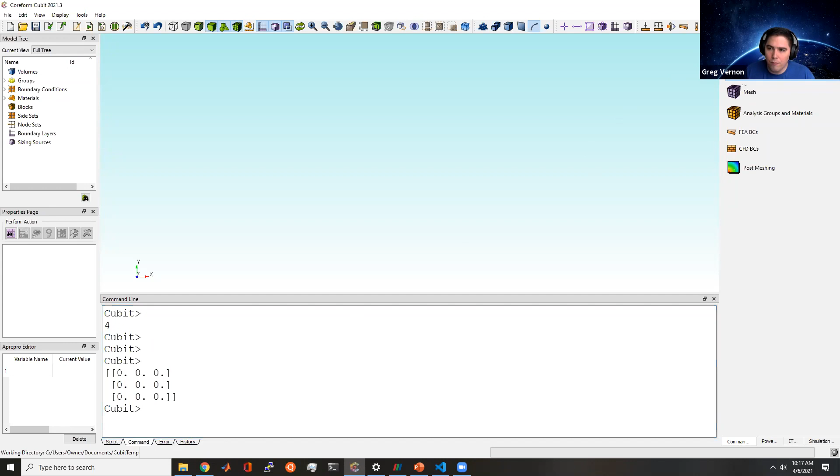Now I want to show how you would use the Cubit GUI to generate functions that you might use in Cubit. It looks like most people are familiar with journaling, but if you're not, Cubit, before it was a GUI, was actually all Cubit command language. Commands are then journaled or logged into a history file. So as we start doing things in the GUI, maybe I'll create a brick of dimension maybe 10, 5, and 1.

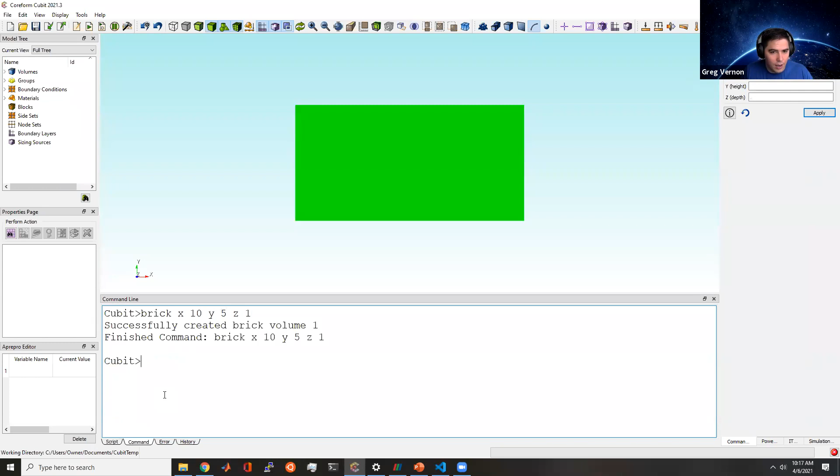The GUI actually sends the command to the Cubit command language processor, and this is journaled in our history. So what I could do is, well, maybe I should just use the GUI for a little bit. I clicked on new file, and that sent a command like reset. I can do things again in here like brick x10 y5 z1, and do things that I had previously done inside the GUI.

Many of you might be familiar with using the GUI to create these syntaxes and then copying your history file and putting them into a journal. These are also logged to the scripting panel. So you can either grab the entire cubit.cmd, or as we'll talk about, this is the first workhorse function, this module cmd or command.

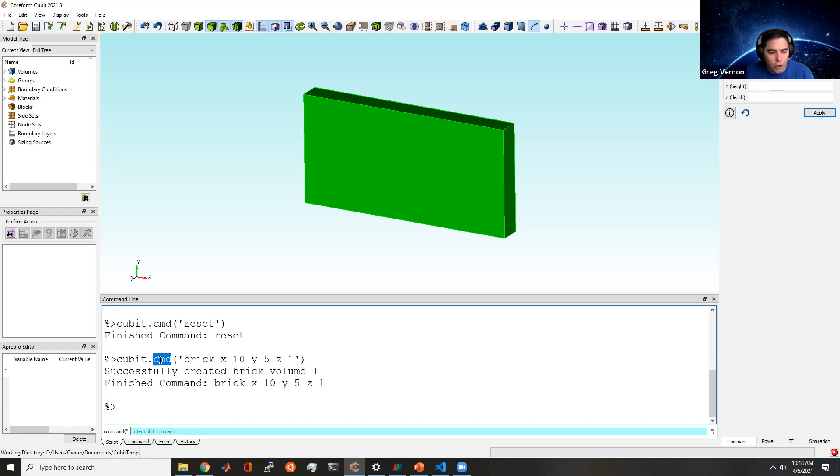Every single Cubit command can actually be sent through the Cubit Python interface and executed as if you had entered it into the command editor. As you can see, I can do things in here like cubit.cmd and pass in a string called reset. That is effectively the exact same as running reset from within the Cubit command language. And I could then do cubit.cmd brick x10 y5 z1, and then I can create this brick.

Now, if you're a Python user, you might want to be able to pass in some arguments into your script and then run those. Many of you might be familiar with Aprepro within the Cubit command language, which will create Aprepro variables. But the Pythonic way with a string is to use string formatting. So just as an example, say that we have variables called maybe x, y, and z.

And we want to pass these into our function. The Pythonic way, maybe I've got some string here. I might copy this overall string, and then for Python formatting, you replace the constants that you want to replace with curly brackets, and then use the string method format.

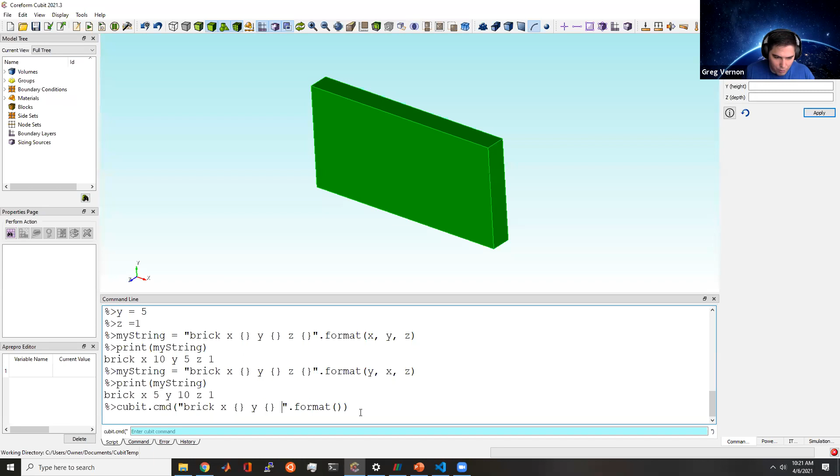And you pass this string into CMD. So putting it all together, your command might look something like this: cubit.cmd. Let's begin our string. I like to begin with my outline. I'm going to put in brick x, curly bracket, y, curly bracket, z, curly bracket, and then format with x, y, and z.

And maybe I'll do cubit.reset so we can see this again. So if I run this again, we'll see that this has created the string, entered in my values, and then executed this command. So that's the cubit CMD function.

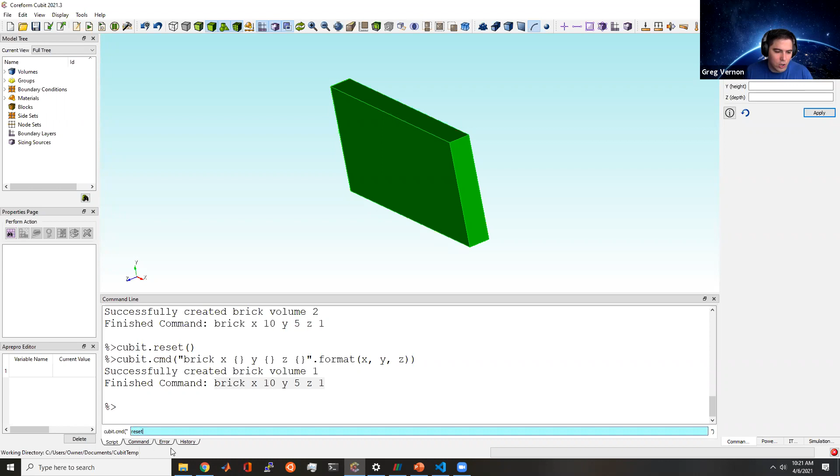Something that new users might like to see - you can't use string formatting here, but if you're not exactly sure, or you just want to do something quick, you can type commands into this little shortcut tab, which is one of the options we set previously, and it'll just run these. That can be useful when you just want to see a command run real quick and maybe extract out something. I personally don't use this a lot, but it is a good training wheel.

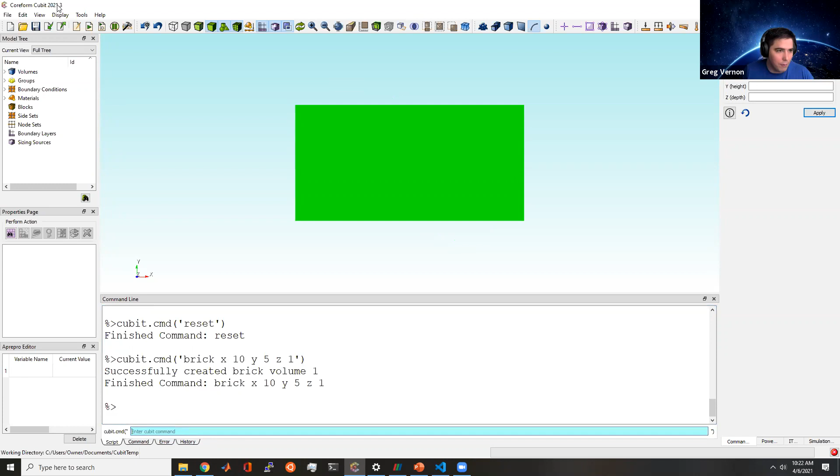Another really useful command, let me open up a good file for this, is a method called parse cubit list. So I'm actually going to find this in here. Parse cubit list will take the Cubit command called list, and it'll extract out key information into maybe an array that you can then use in Cubit. Let me just demonstrate this.

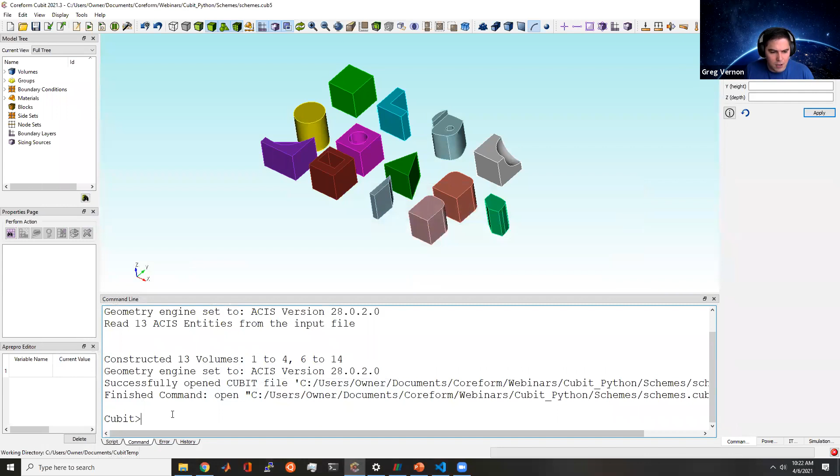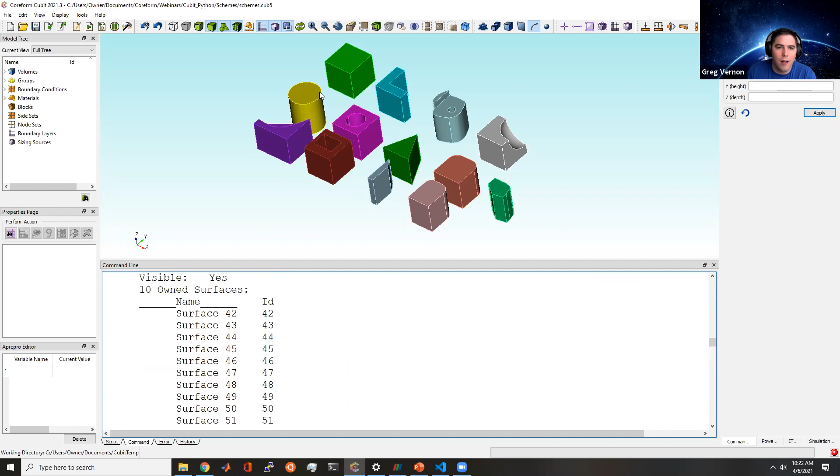You might be familiar with doing things like list totals, to get out maybe the total amount of volumes or surfaces in a model. You might also say list volume with x coord greater than 0, and then it prints out body 14, body 13, 12. So it's telling us what volumes have their x value, or the x value of their centroid, greater than 0, and just lists these out.

So what do I want out? I want volumes. That's the first argument, passed in as a string. The second argument is the logic behind it - so x coord greater than 0, again as a string. And I might use string formatting if I wanted to change this value of 0, or maybe I don't know if it's going to be x coord, y coord, or z coord, so I can do string formatting for all of these.

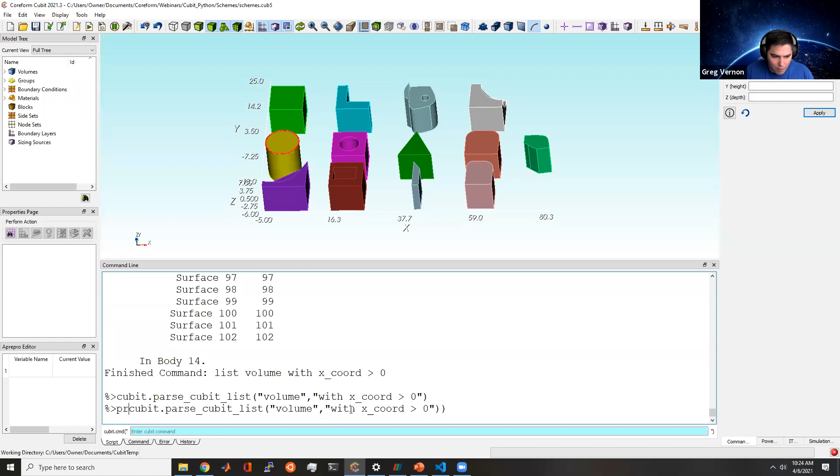And if I wrap this in a print statement, we'll see that now it's giving me out a tuple that has all of the volumes that meet this criteria. And I could do more things - I could say maybe I want to know the vertices in volume 1, and I could print out those vertices.

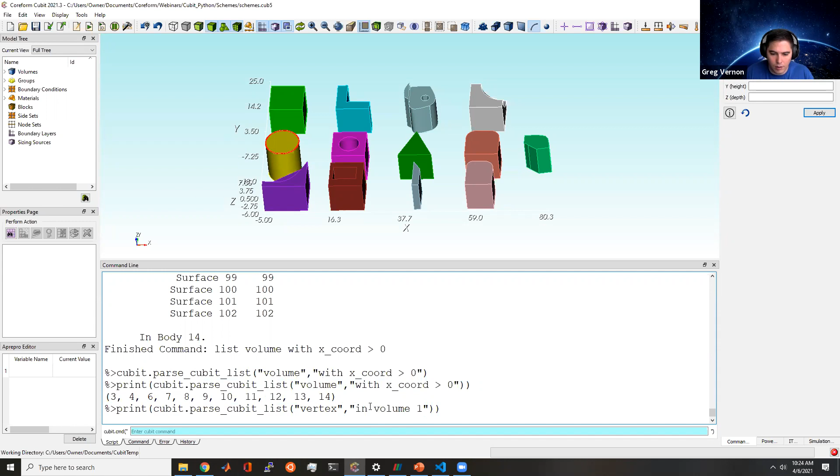I can go the other way around - maybe I know a vertex and I want to know the volume. So I could say volume in vertex 1, right, this is like vertex maybe 20. Volume 3 contains vertex 20.

So you'll really find that this parse cubit list is a really good way to get out key information, whether it's knowing what elements are in a certain volume, or what volume contains a certain element or node, or getting out geometric properties and doing a lot of quick calculations. This parse cubit list is one that I highly recommend - it's one that I use all the time.

A few other options I'll go over briefly. As you're building models, you might want to know what my most recent volume ID is, so that as I create another volume, I know what that new ID is. So there's a command called get last ID.

It accepts a string, and you tell it that the string is the geometric entity. So maybe I want the last volume that was created. I'll wrap this in a print statement. It tells me 14 was the last volume.

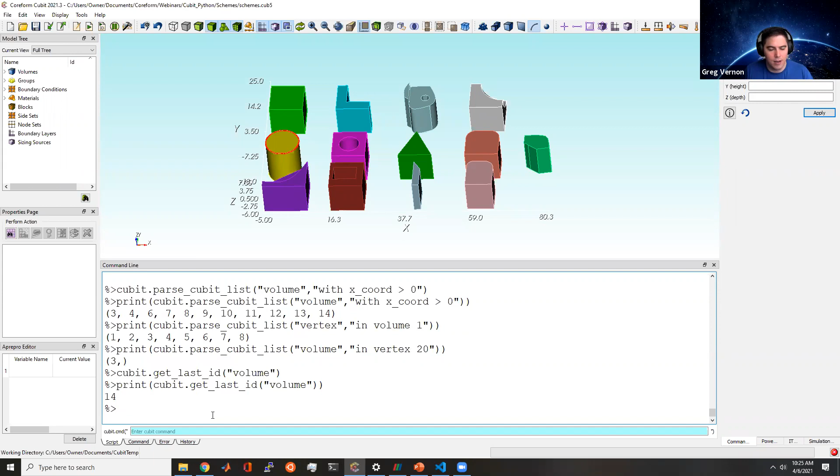So if I create a new volume, maybe a sphere radius 0.2, then that was volume 15, because it was incremented by 1 from the previous last ID. I can reprint this again, and it'll tell me that 15 was the last volume I created.

That can be really useful as you're building scripts that may not be building in a pristine cubit session. You might be building inside of an assembly, and you need to know what the last vertex, curve, and volume IDs were. Lastly, there's also get entities. This is useful if you want a list of all the volume IDs so that I can loop through them, say.

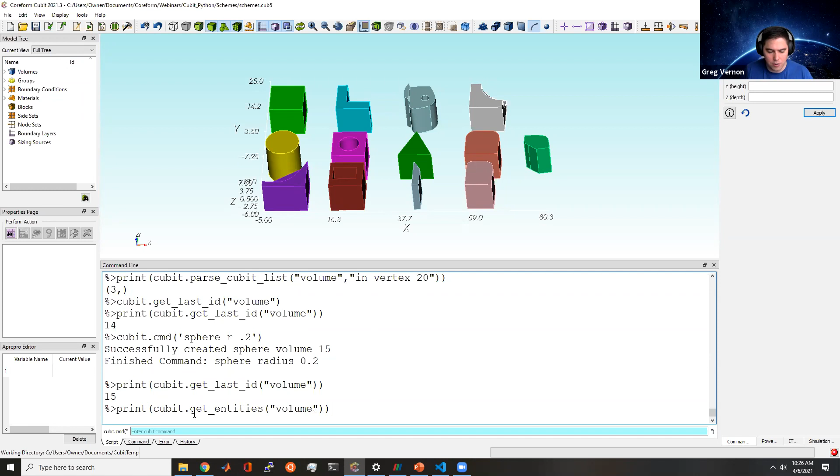So let's wrap this in a print, cubit.get entities. Here we just tell it a string of what kind of geometric entity we want. In this case, I want a list of all my volumes, or maybe all of my vertices.

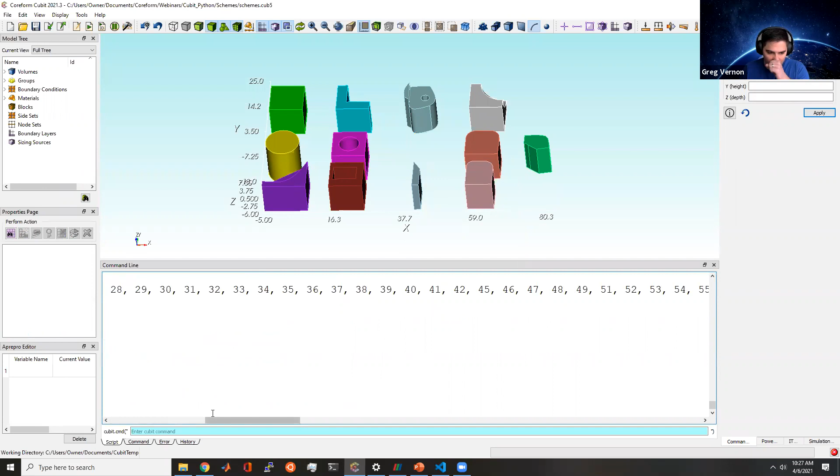So if I delete a volume, say volume 9, I can then print out again this get entities volume, and you'll see that 9 is now missing. So those 4 commands form the basis of a lot of the things you'll do.

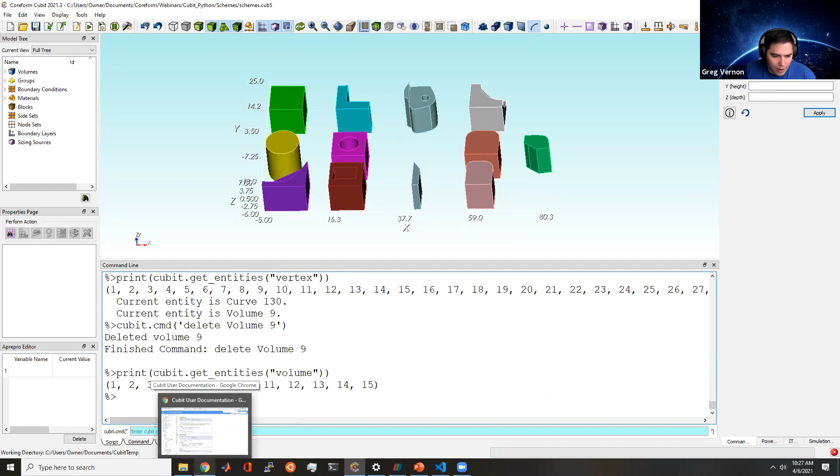One thing I'll also mention is that we provide a list of these entities: bodies, volumes, surfaces, curves, and vertices, and they themselves have their own functions. So for a surface, I can query the ACIS geometry engine and get out things like the principal curvatures of a surface, or get the normal at a certain location.

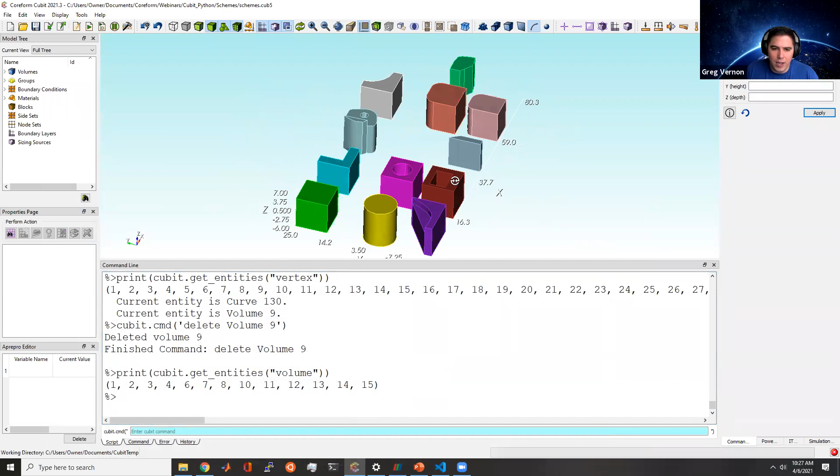Say I want to know a tangent along some location of this curve 130. This would be cubit.curve, 130 is how I access that curve. I'll put this into a variable called C. And then I can do things from the object.

I can get a position from its U value, U being the parameter along its length, so maybe at its midpoint. I'll wrap this again in a print statement so I can get out a tuple of its XYZ coordinates. I can then pass that directly into curve tangent.

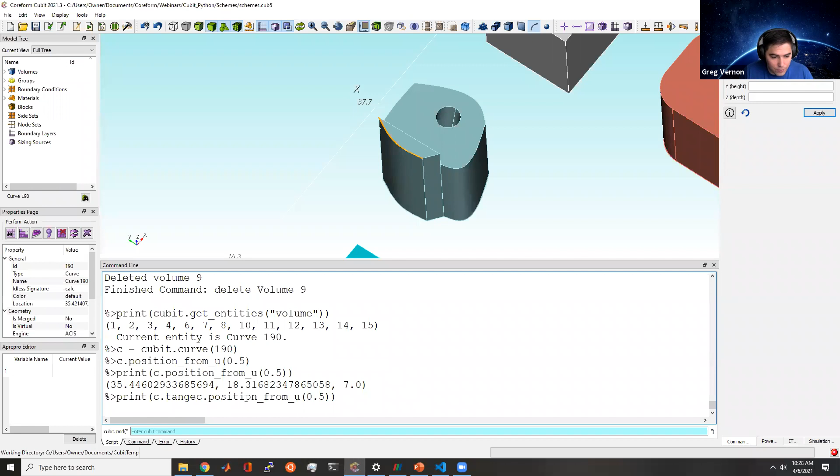Curve tangent will give me the tangent at this location. I can get out the tangent value. So again, these objects of curve, volume, vertex, and body have a lot of really useful functionalities that you should take a look at if you're interested. So those are the workhorse functions.

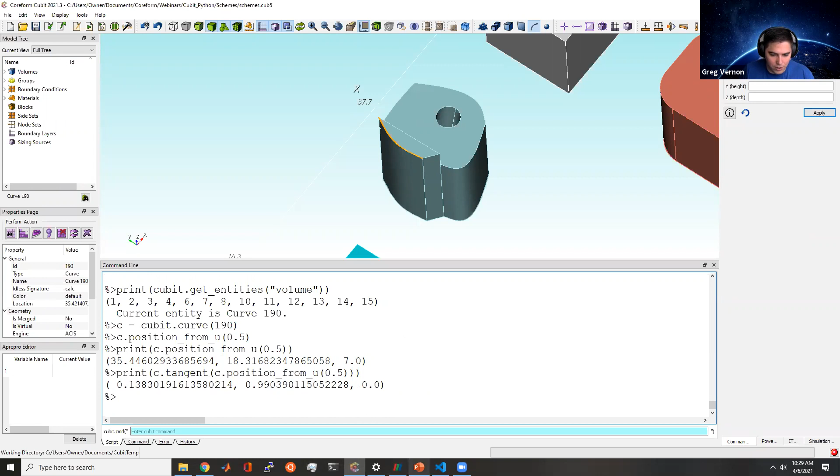Can I ask a couple questions before you move on? Sure. How do the coordinate axes appear alongside the volumes? Good question. That's a little GUI icon - it's toggle scale, right next to where you can toggle the perspective from parallel or perspective. This one has little tick mark axis grids, and if I turn these on or off, they'll pop in and out.

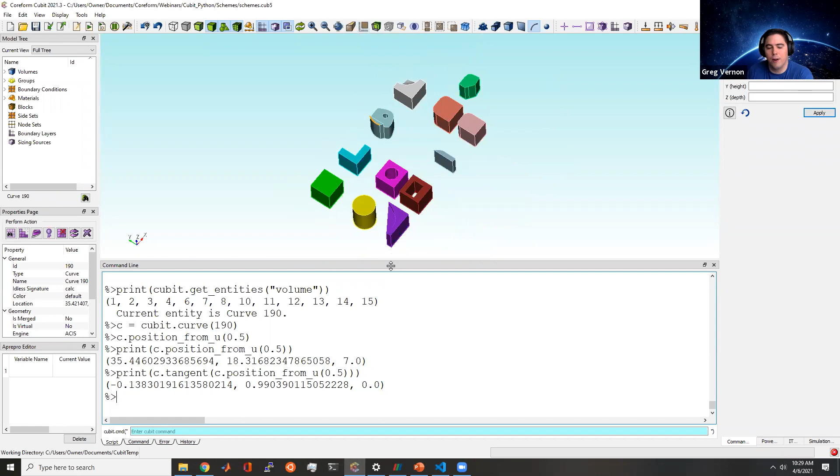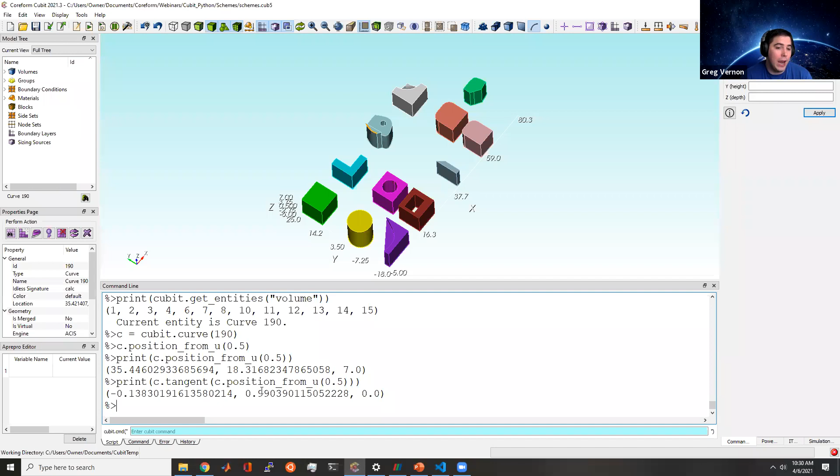Here's another question: is it possible to define a Python interpreter for Cubit as the Anaconda distribution? That I don't know. I know you could use, we'll show this later, whatever external Python you want, as long as the versions match what Cubit's version is, I think that's a requirement. If you had your own external Anaconda distribution, you can call Cubit from that Python, but you wouldn't have the GUI attached with it. We'll show an example of that later today.

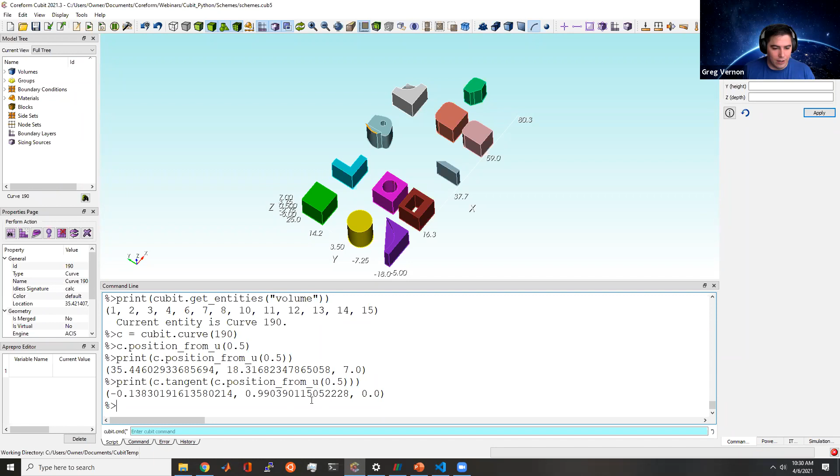All right, moving on to some of the advanced functionality. I'll kind of move back and forth. I want to show a real problem that came courtesy of Professor Thomas Roth at Purdue University, who had a question regarding how to mesh a model or geometry for his computational quantum electromagnetics calculations.

So let me just open this up real quick.

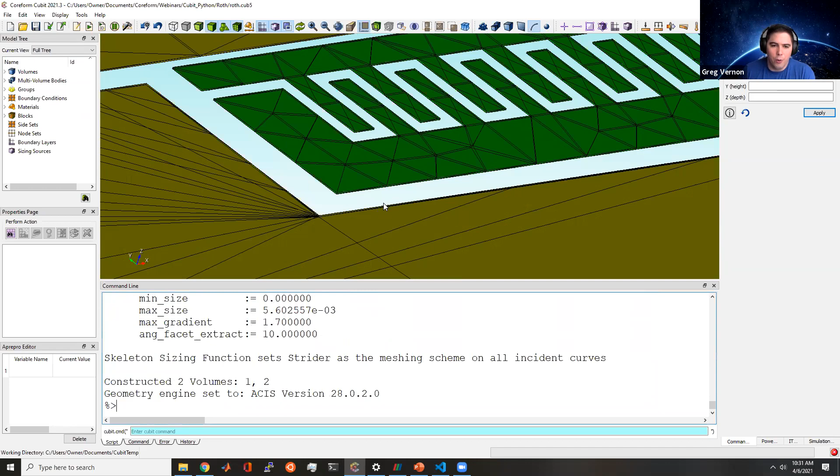So if Professor Roth is on, he may be able to correct me if I get these wrong, but this is just a surface model. He's doing some kind of boundary element type approach. He's not building a tetrahedral mesh, but he does need high quality triangles on his mesh.

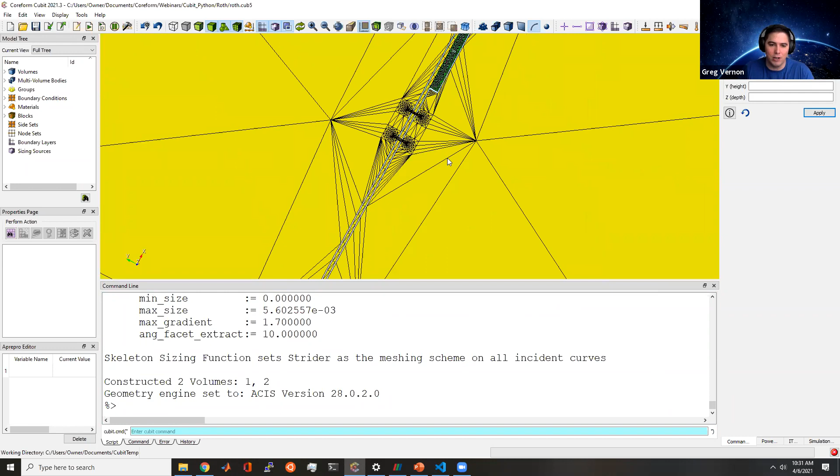As you can see, some of these triangles are just from the default meshing schemes and meshing sizings. Some of these are not very high quality triangles. But he also wants to reduce the number of triangles over the entire domain.

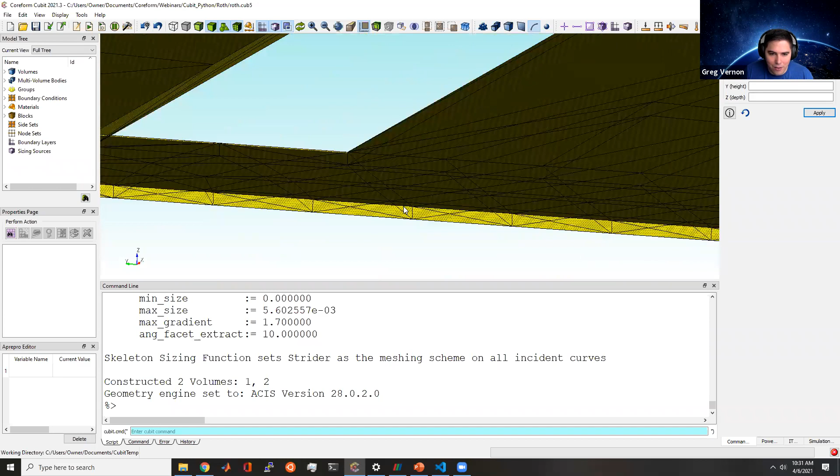As you can see, even VTK is having a hard time rendering because this model is actually a very, very thin volume. And if we zoom in, we can kind of see here's this edge. So this is a very highly disparate scale.

If we turn off the meshes, you can see he's got some surfaces defined. And what we'd like to do is go through programmatically and find small surfaces and assign them small meshes, and larger surfaces with larger meshes, and then let the Cubit meshing algorithm blend between those two meshes.

So let me mention a couple of things also. The original journal file, if we look through, is using just standard Cubit command language in journaling, again using this Aprepro style syntax. As you can see, we're not in this case using looping.

We're trying to track what our volume IDs might be, and what surface IDs are. And this, if many of you might be familiar, can sometimes be brittle, in that an ID might change if you change something upstream.

So I've actually rewritten that creation into a Python script that uses string formatting and commands like get last ID, so that I don't anywhere have to actually worry about what the specific ID is. I just have to worry about relative IDs.

So as long as I track what, as long as I know how many vertices are being created by each command, then I can do things like offset or index to them.

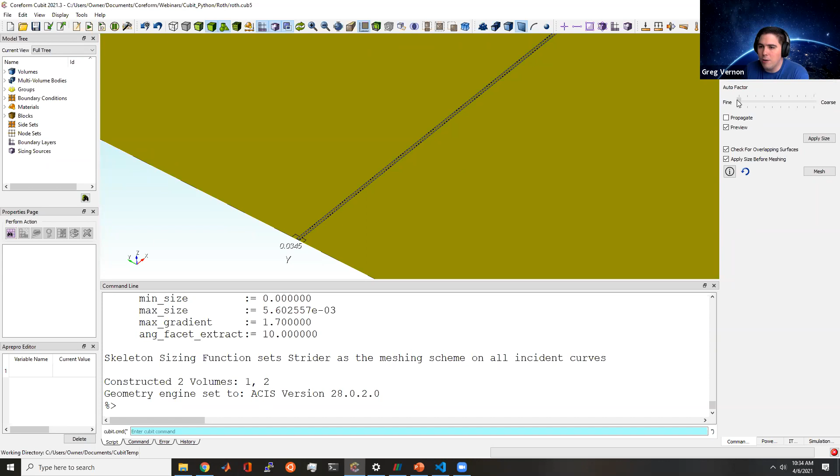Now, once I have it in a NumPy array, there's a command, or options in Cubit under meshing for intervals. There's this automatic sizing from fine to coarse, and there are 10 increments here. So if I zoom down to maybe this surface, I could say that this surface I want to be meshed with as coarse as possible.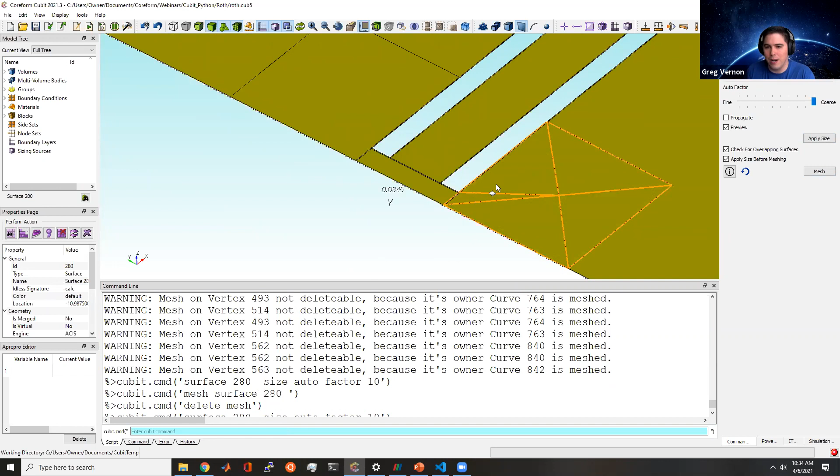Oops, I gotta turn on. So let's do delete mesh. So this is a very coarse mesh, and as you can see, maybe there's triangles that are already not very good. Or I can set it to maybe a finer mesh.

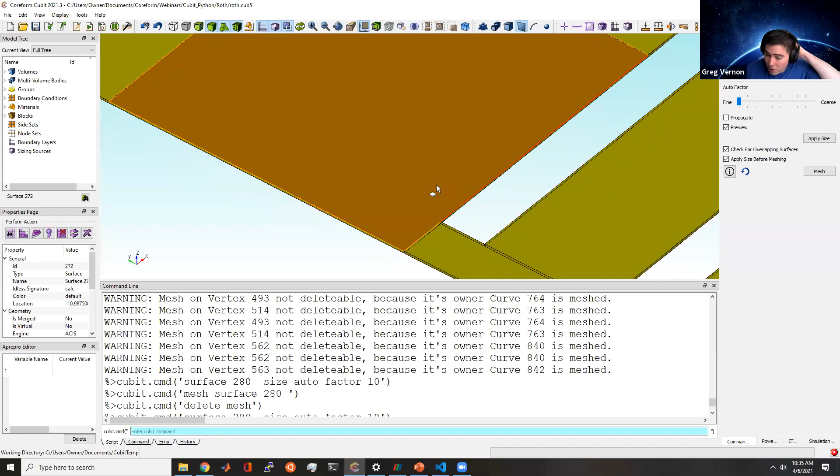This should work anyways. Maybe as fine as Cubit decides it needs to do. The issue here is that I can assign a size, but Cubit doesn't see a need to make this any finer because there's no neighboring triangles.

So what I need to do is mesh from the smallest surface up to the largest surface, so I can dictate element sizing.

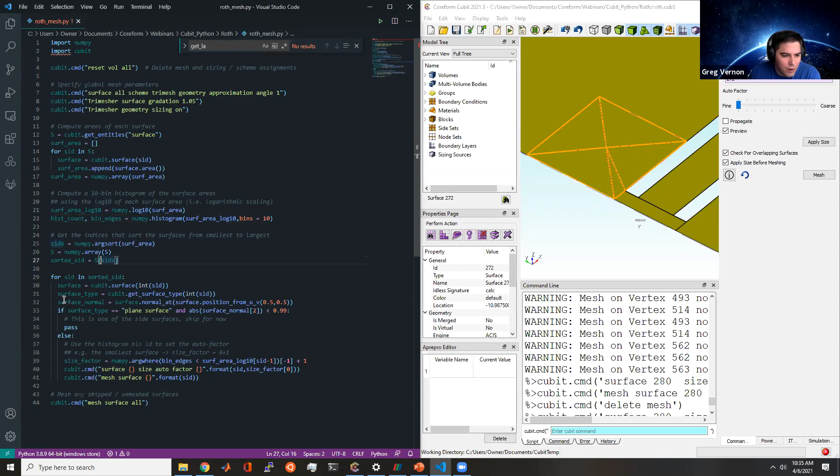So what I've done is first get the log 10 of these surface areas, and put them into a histogram with 10 bins. And I've sorted these areas into those bins, and I'm going to mesh them from smallest to largest.

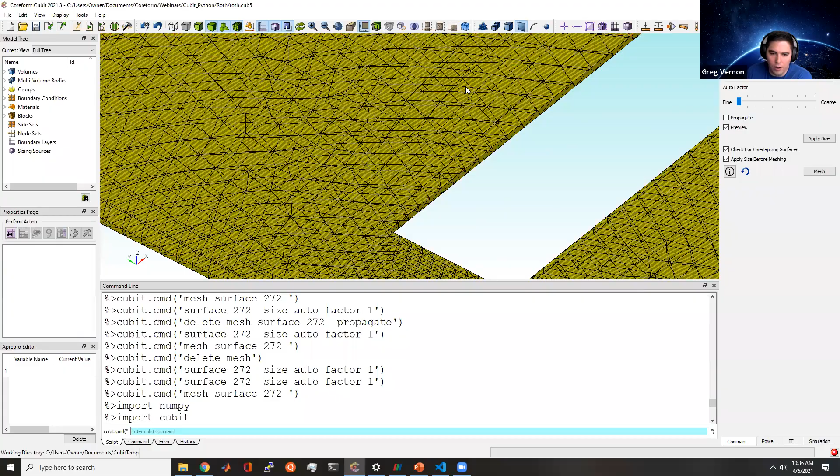And so if we run this script, you can see this as it's being generated, we can actually see the mesh being calculated. And we can see that this has now worked to mesh the smallest surfaces first, and then gradually transition to a coarser mesh.

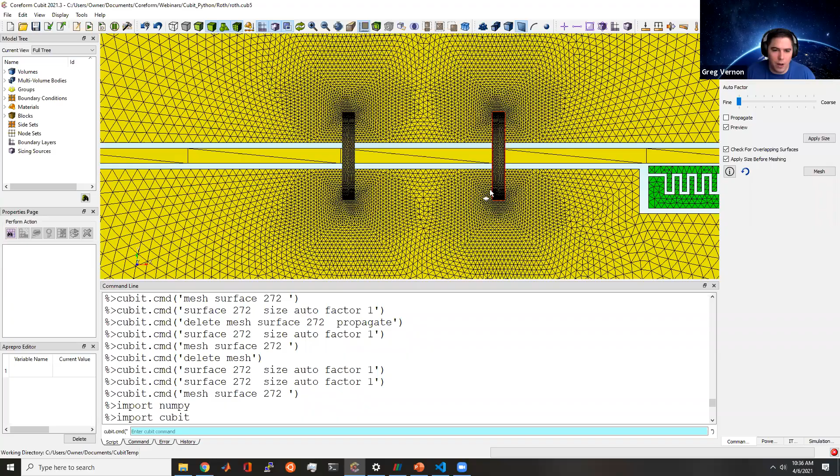And so this is then the kind of quality triangle mesh that Professor Roth is looking for, but then also does grow to large elements, so we don't have just a massive amount of degrees of freedom. And these elements are quality enough for Professor Roth's codes.

So this is an example of where I've taken existing functionality within Cubit, its automatic sizing, and added my own little flavor to how to actually mesh this particular geometry by sorting surfaces from smallest to largest, and then assigning them to the different auto factors through binning.

So another example I want to show is writing a custom mesh import function. Let me just...

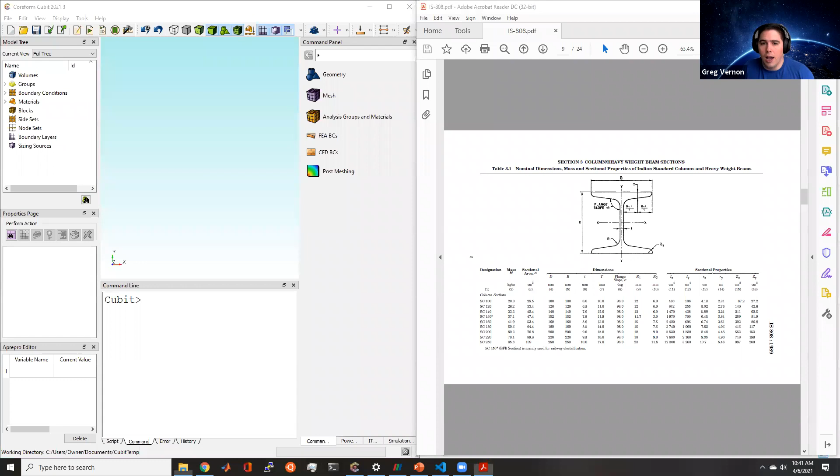So what I've done, let me close these, is I've written a Python module that has many different functions. In Python it's recommended that, as opposed to writing a long script, you try to functionalize things, turn things you're doing over and over into a function you can reuse. So I've written a class here that defines section 3 parameters, like the dimensions, as well as a few things like validating that a designation someone has entered is valid.

And then I've got these different functions that build geometry, and actually go all the way through building and exporting mesh. And the way that I've handled the geometry—since Cubit doesn't have a sketcher yet—is I've done the geometry calculations, and I'm actually using SymPy, symbolic Python, to solve a few equations that I need to enforce constraints like tangencies and things.

I've calculated these equations by looking at the drawing and building up a system just geometrically. A sketcher is definitely something we're looking to add to Cubit in the future, but it isn't there today. This is just one way I've been able to use the Python interface to solve a problem for myself.

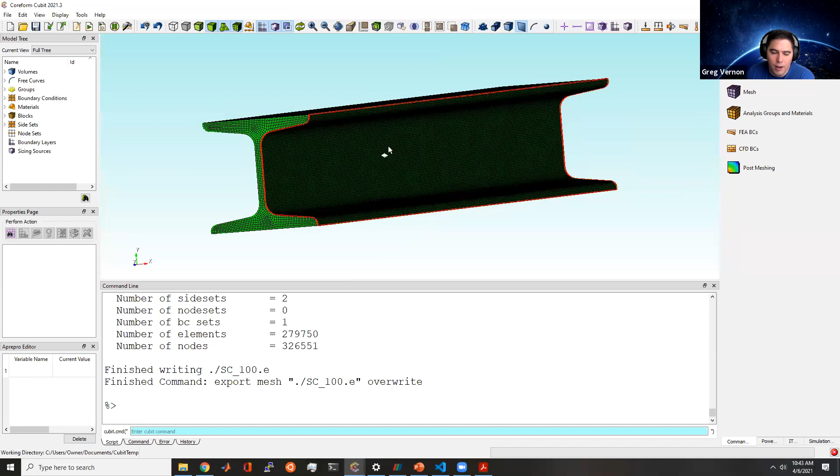And then I can just run it from within here. So we'll just watch as this function goes through. Now it's meshing, and then it's exported out to the Exodus file. So that's now something I've automated away if I want to.

That's just an example of some of the things you can do by using Python. There's no clean way to do this with the Cubit command language—you'd have to solve these equations by hand and then enter them in. But because Cubit Python subsumes Cubit command language, it's just a part of it, and then provides you all the power of Python. This is the way to build complex models like this in Cubit.

So then what I wanted to do is, maybe I've decided that my department is doing a ton of work with beams, so I need a fast way to load in any beam I want. We provide a way for you to add functionality into the GUI as a GUI-based command, so there's the ability to add a custom panel.

We have documentation for this—if I can find it quickly, I think it's under customizing user experience, adding command panels to the GUI. There's documentation here. You can use the open source Qt Designer to help build the actual interface within Cubit, wherever Cubit is.

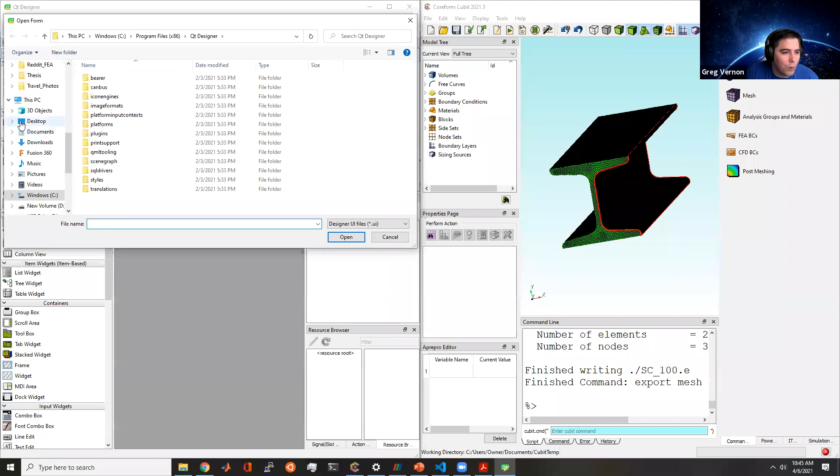So let me see if I can import or open this up from a recent file. I built a little panel UI here that just asks for section designation and length. I've also done a few more things with XMLs, which again are documented in the documentation, and I've adapted my original script into an apply script with a few extra things.

So I import user panel from the Cubit GUI—there are a few extra things I've had to add, but only a few things actually change. Once you've written that first module, it's really simple to move forward.

What we can see now is that under create geometry volumes, I've got a GUI command for Indian standard beam. So I can create an SC100, maybe of length 1,000, and maybe I also want to add an HB150, also of length 1,000. I can just choose any of these and add beams to my heart's desire.

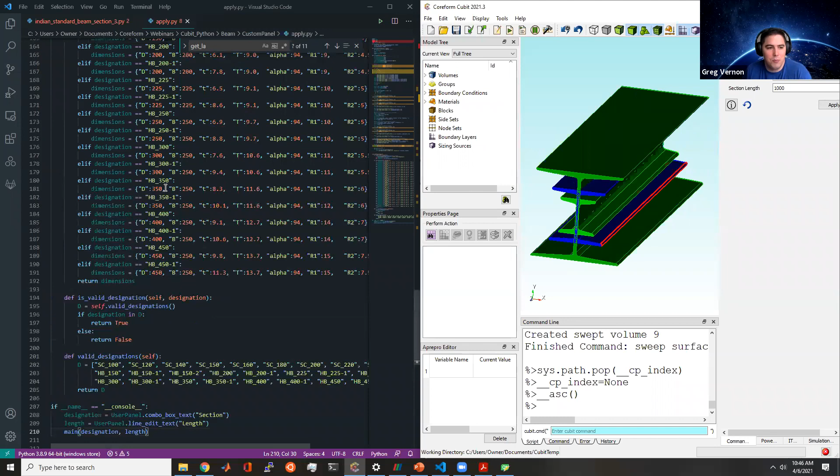The way I've managed to do this is because I can define an object or a class in Cubit, and I've got all of these dimensions pre-stored. That's a really cool thing you can do with the Cubit GUI. You can do this for volumes, or add the meshing scheme we talked about previously as a sizing scheme, and add arguments for things like how many bins you want, or log versus linear scaling. All of this functionality you can edit using Python as the backend.

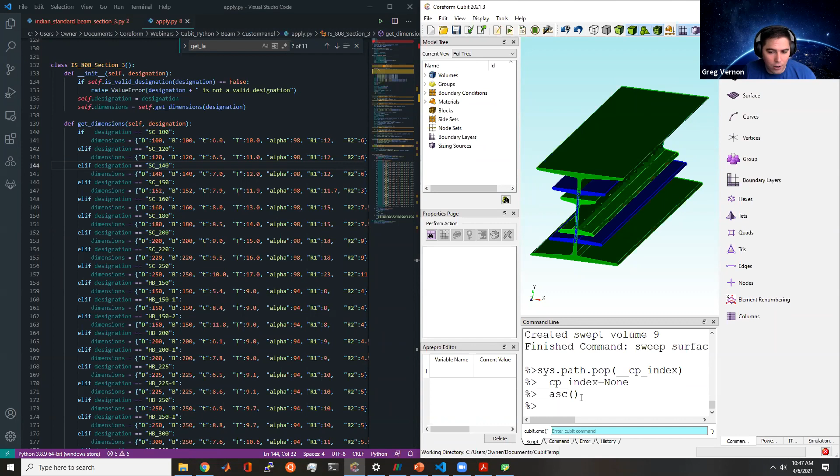So the last thing I want to show today is how we might automate our entire simulation process. I'm going to show this in Moose. If you're not familiar with Moose, it's an open source finite element code managed and maintained by Idaho National Laboratories, with many users across the world.

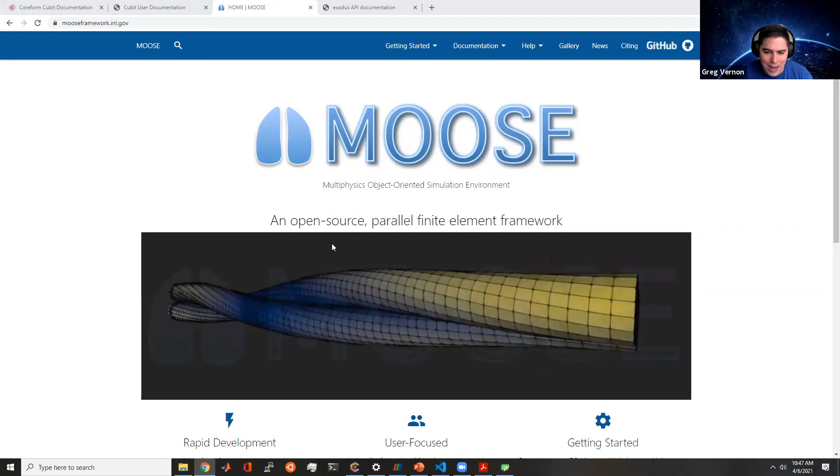Moose is based on the Exodus mesh format. The Exodus mesh format is its preferred mesh format, which happens to also be the native format from Cubit. So a lot of the Department of Energy codes are based on Exodus and have used Cubit over the years as their preprocessor.

They have a great getting started guide if you're interested in getting started with Moose. They have probably the best documentation I've seen for how to actually get started installing Moose, even for Windows, using Windows Subsystem for Linux, which is actually what I'm going to be using.

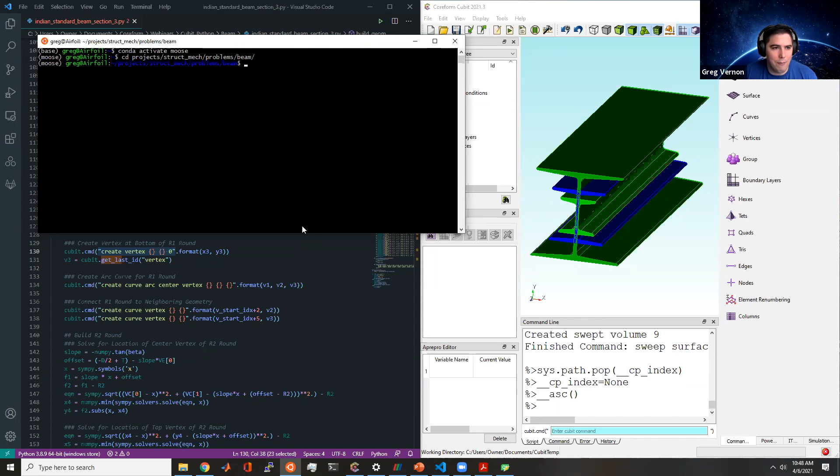So I'm just going to open up my Windows Subsystem for Linux, and activate my Moose Conda environment. I'm going to go to a Moose application I built called Struct Mech, and I've got my little beam problem in here.

So I've written a little script here called run beam moose, also on my Windows Subsystem Linux. I'm doing a couple things here: I'm going to import this module I've written previously so I have access to building those beams. I'm also going to import the SEACAS library, another open source tool.

It's the Sandia Engineering Analysis Code Access System, which is what Exodus format is a part of. I'm going to import a module there called exodus.py. There's documentation on the SEACAS GitHub for this Exodus Python module, which lets me go in and query Exodus.

So I've written a simple function that, within a certain directory structure I've built, does some file management. I'm going to first build my geometry, then do some organization, moving my input mesh into a directory called syminput. I'm going to run Moose and move files to the output. I've also structured this param input file with an APREPRO-like syntax where I find and replace certain strings with the mesh format I'm exporting.

Using the API, is it possible to determine if hex mesh elements that belong to two different blocks share a face? Yes, you can. So off the top of my head, one way you can do this is... let me just zoom this back out.

So there's probably an easy way to do this, but there's also a way that might be a bit more intense. What you can do is use mesh query support.

You can get connectivity for certain elements, and then you could get their sub elements like their faces, and look for whether these nodes are shared on different faces. But you can also get the geometry owner, and this will give out multiple.

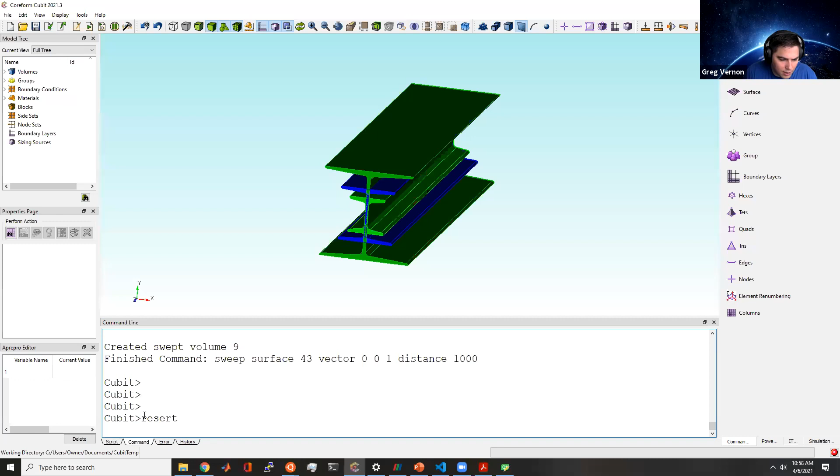Let me just see if this will work here. Let me reset. Brick x1 and 1 again. Let's move vol 2 by x1. And so if we do imprint all, merge all, mesh vol all.

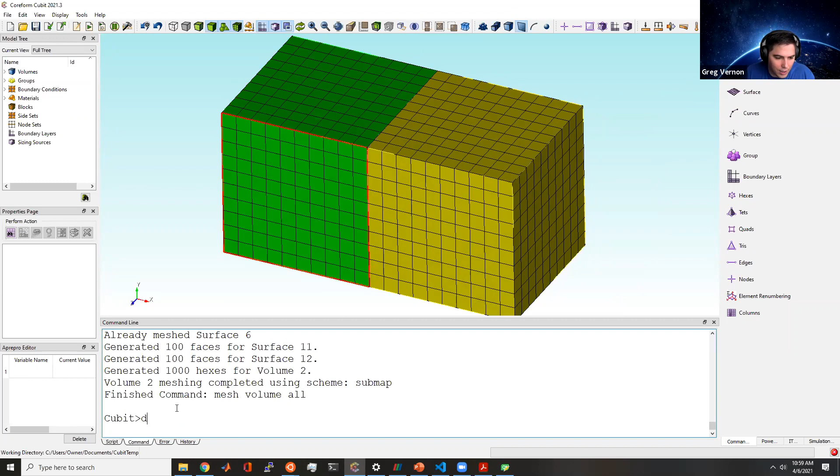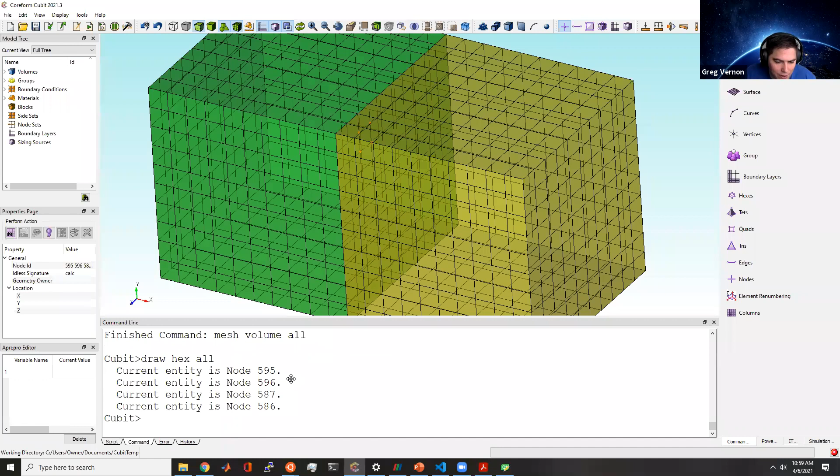So this is what I think you could do. Let's see if we can find draw hex all. If we could get out a face on the interior, let's say we know what our nodes are here, like 595, 596. So what we should be able to do, hopefully this will work, let's do it live.

In the scripting tab: cubit.get geometry owner. And it's going to take in node, and then the number, so 595. And if we print, this tells us surface 6.

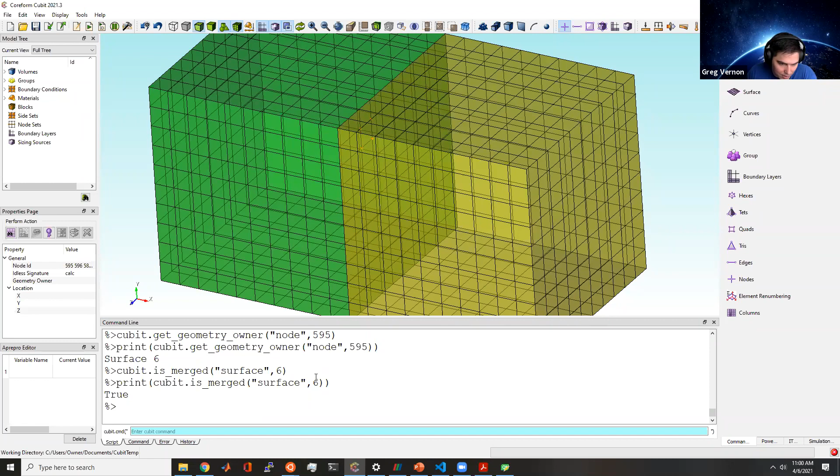And so surface 6 is probably a merged surface. So we can do cubit.is merged surface 6. And that's telling us that yep, this surface 6 was a surface we had merged together with another surface. So it's actually two surfaces kind of in one, and this node has been on that surface. So it's maybe a two-step process that you might do there.

But that's how you would determine it, and these nodes then define the face of that element. And you could obviously from those nodes get out what element they were.

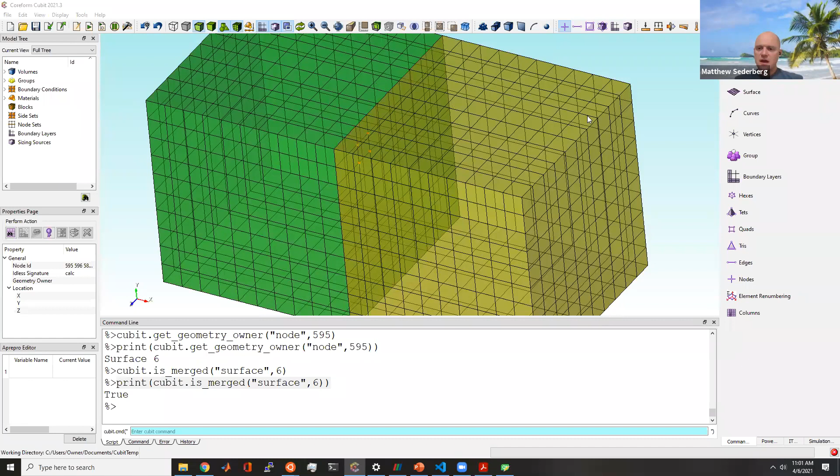Okay, just a couple more questions. From Jonathan: will we ever see Python cubit on PyPI?

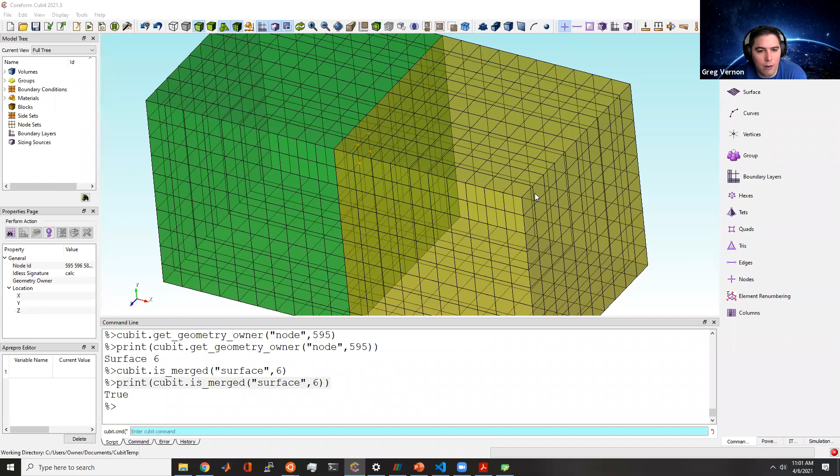That's a good question. To be quite honest, I just don't know enough about that. But my guess would be no, partially because the Cubit Python API does wrap some of the ACIS geometry kernel, which is a proprietary kernel from Dassault. We've had this discussion before about how we could make Cubit more open, and it really comes down to the fact that a lot of the power of Cubit comes from the commercial libraries that we use, so that can be difficult.

However, we do offer a free version of Coreform Cubit, which you can request from our website. It's called Coreform Cubit Learn, and it's a fully functional Coreform Cubit, with the only limitation being you're limited to 50,000 elements on export through our built-in exporters.

However, in a pinch, because we provide Python, you could obviously write out your own custom format if you needed. But it is a non-commercial version of Cubit. That's at least one way that you can get that access if you want to.

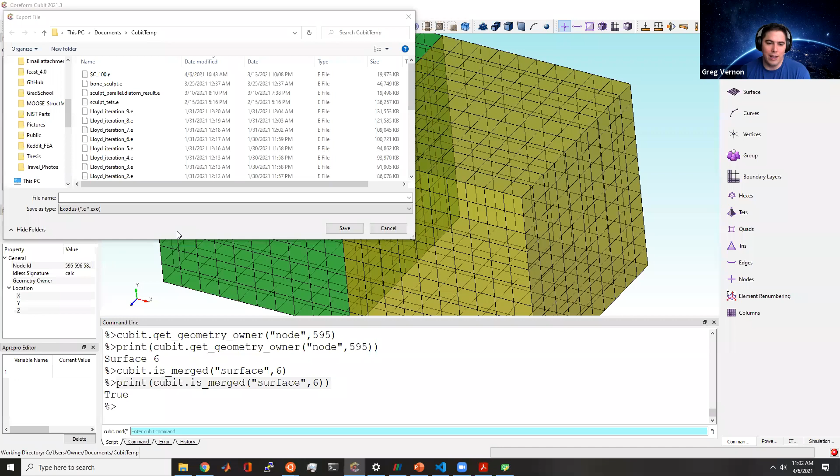Okay, last question from Duke: can I get an example code mesh that uses Python to mesh a model, like a shell or a solid? There are a lot of big questions coming in, Greg, acknowledging the value in having access to these scripts you've been writing and maybe others. I think that's something we can share out after the webinar.

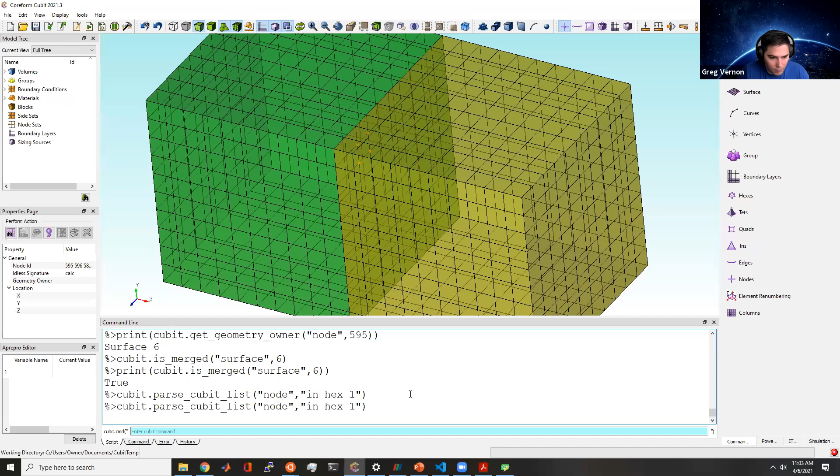Ada has a good question too on the parse cubit list. It does also handle elements as well, I believe. So we could say node in hex 1 and print this out. It essentially will do anything that you can do from standard cubit list.

If you could list node in volume, this is usually how I build my commands: I first try to think, like list node in hex 1, and see if it gives me any input, then I know it's going to work. That's typically how I'll capture this and put it into my cubit command. So yeah, that's a good question.